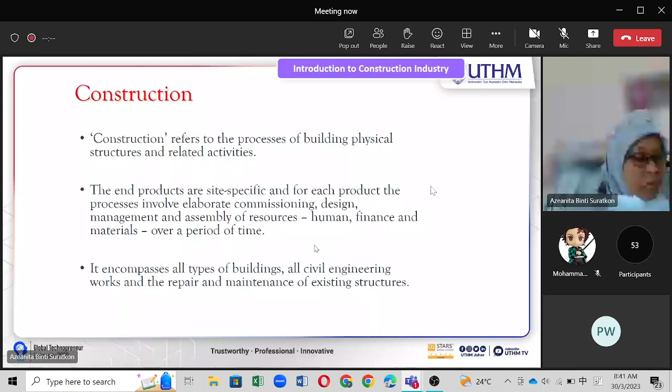Okay, so today I think we start here. Project management. Right, so we are going to try to distinguish what is project management, construction management, and contract management.

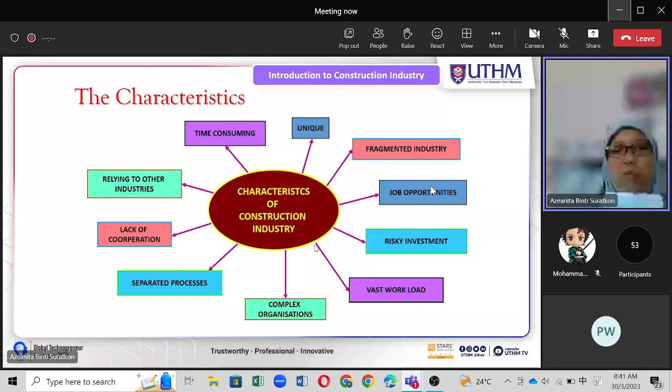Have you taken sustainable construction management subject? Have you, among you? Not yet? Yes, okay, so yes means you already taken that subject. Right, okay, so for those who already taken sustainable construction management, this definition is some sort of revision. Hopefully you have better understanding since this is second time or a revision.

Okay, so project management, so we have to look into what is project actually. Project is a temporary endeavor undertaken to create a unique product through a set of interrelated tasks. So it is a temporary effort, meaning we have certain duration to put our effort, and the objective of that effort is to produce a product, a building or infrastructure, and in order to materialize the product, we have certain activities, tasks to ensure that the product can be produced.

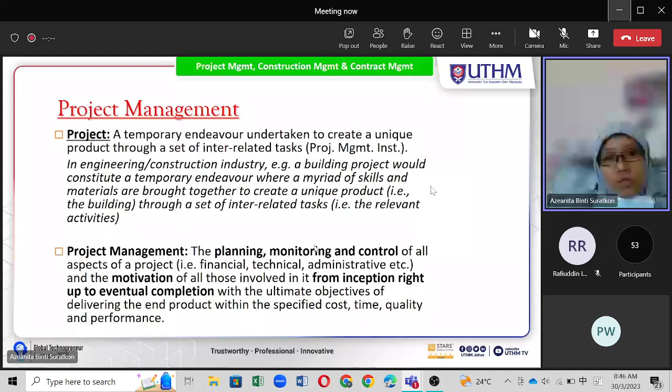It is actually, in general, a term used to describe a particular type of contract procurement method. This is like we mentioned last week, procurement method. We learn about design and build. So all these things are examples of contract procurement method, or project management method.

So construction management, CM, is also one of the contract procurement methods. So there is one general definition of construction management. And then the second one: the actual process of running a construction project is also called construction management. Similar to project management, because we have the word management here, it must comprise these three things: planning, monitoring, and control.

The same applies to all aspects of the construction process, but this is limited from pre-tender to the completion stage. Pre-tender normally means before we call tender, before we open tender for the project to any contractor. This may include preparation of the tender document, maybe finalizing the design, for the purpose of tender. So that is part of construction management.

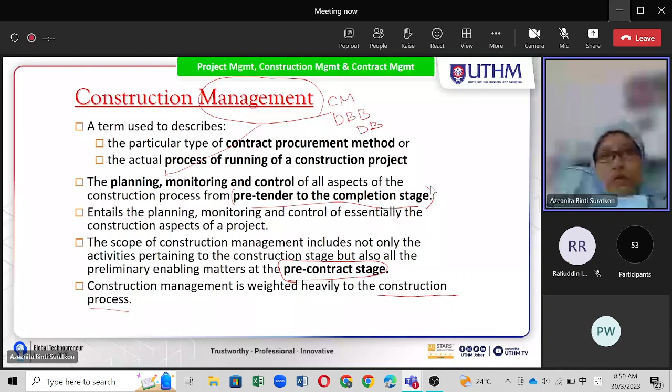Contract itself is actually a legally binding agreement between two or more persons which creates mutual rights and duties enforceable at law, or a legal device for conducting exchanges between parties, binding parties to future performance. So we are talking about agreement - contract is actually understood as an agreement. The agreement must be legally binding, meaning it is governed by law.

Between two or more persons, and then we have this mutual rights and duties. So if we talk about agreement, actually we can create mutual rights and duties. At the very beginning, both parties will have these rights and duties - they agree mutually, both sides. And the agreement can be enforceable by law, meaning it is legal.

So it is also called a legal device for something to be executed, to be performed in the future. So we also have contract - normally we are talking about something that we will do in the future. So that is contract.

Contract management is a term to describe the control and administration of the legally binding agreement between two or more parties from its inception up to its final discharge. So actually we are controlling, we are administering the legally binding agreement. There are procedures, there are few rules and regulations that we need to follow throughout the contract, from its inception up to its final discharge.

So like project management, we have the contract management part of it. The same goes with the construction management. So contract management is actually within both project management and construction management, because during project management the contract actually exists - for example, if we are talking about design, bid and build, this is traditional.

So during the project early stage, for example, during the planning, and then maybe we are talking about design stage - at this stage actually there is a contract between client and also the consultant who actually comes up with the design.

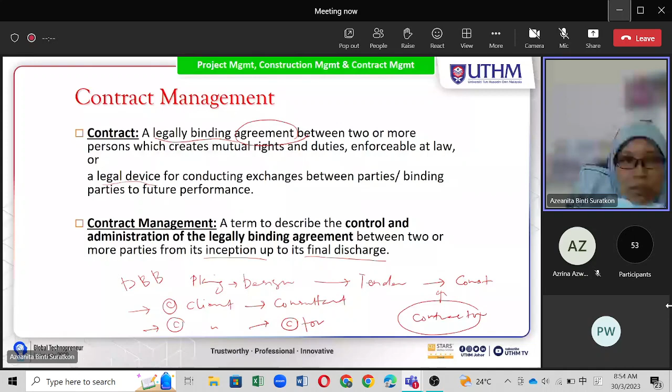So for example, for construction project, we will have articles of agreement, and then we have standard of contract where actually they have a clause, clauses actually spell out for the contract. For example, what is the SO responsibility, what is the contractor responsibility.

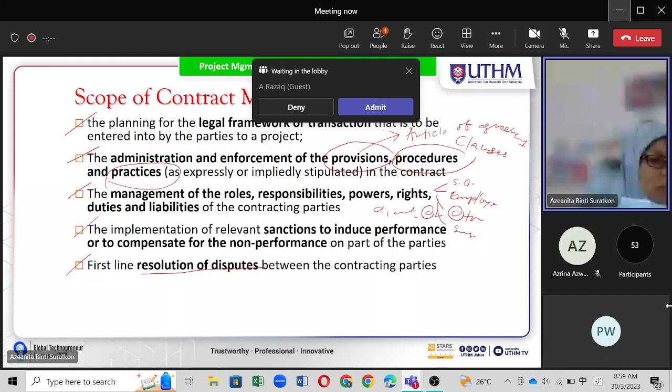If one party is not performing to what has been specified in the contract, what can the other party do - giving warning, for example. These are examples mentioned in the contract. So this is the scope of contract management.

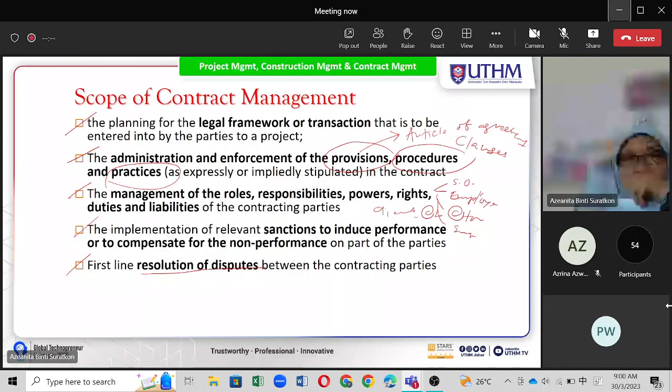Next, purpose of contract. The contract entered into by the parties is actually contract management. So what is the purpose of contract management? The parties perform their respective obligations and duties under the contract fully. Once they have the contract and the provisions, they understand what they need to do, what they cannot do, what they should avoid, to avoid the contract being terminated, so they know all those things.

So fully, efficient and fair contract management can be done. The purpose is that by having a proper contract, it would help the parties perform their respective obligations and duties fully. It is clear in the contract that each party receives the full benefit due under the contract - for example when the contractor will be paid, how much, and when the building or infrastructure needs to be delivered and handed over to the client. All these things are specified in the contract, and with that clearly stated, it will help contract management to monitor all those things.

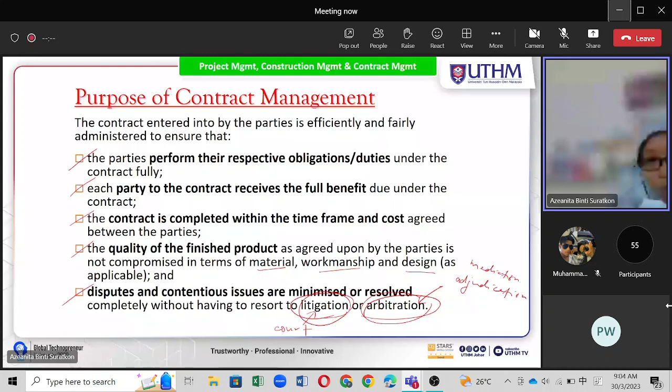Parties involved in construction project and construction and contract management. So this is maybe you can add more, but so far this is what we can map - the stakeholders who are actually involved in any construction project.

So we start here, owner. Owner or developer, so sometimes developer is the owner or the owner is actually the developer. So owner can be from both sectors, public sector or private sector. Private sector like a developer for housing - there are many housing projects. Or apartment, condominium, KLCC, that is actually considered private sector.

Public sector is actually government bodies, for example like UTHM. So this is the owner. We have JKR or Public Work Department, who normally represents as the SO, Superintending Officer, for any government project. That is an example. But for UTHM projects, normally we have an office called PPP, Pejabat Pembangunan dan Penyelenggaraan, Office of Development and Maintenance. So normally the pengarah, the director of this office, becomes the SO of any projects in UTHM. So that is owner or developer.

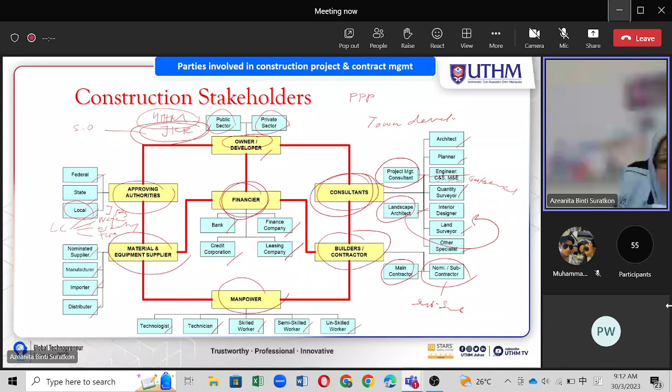And last one, but it is very important, which is approving authorities, whether at federal level, state level, or local authorities. So normally normal project is under this local authorities. Like what, like maybe water supply organization, electricity under TNB, maybe like fire department, something like JPS, something to do with drainage, whatever. These are examples of local authorities.

Right, so this is employer or owner. Just now, employer or owner, so we call also the client, purchaser or authority. Normally the person or party who wishes to have development project constructed on a piece of land. The employer is the most important party to a contract, as he is in reality the paymaster, who initiates and ultimately uses the tangible fruits of the contract. So paymaster here is actually pay the contractor for the work, pay for the land he wants to develop, pay for consultant, pay everything. So that's why we call it paymaster.

He initiates the project. He is the one who initiates the project. If you want to do the building, he needs to have the building, so he initiates the project. And then finally, he will use the tangible fruits of the contract, meaning the project, the end product, which is the building or the infrastructure.

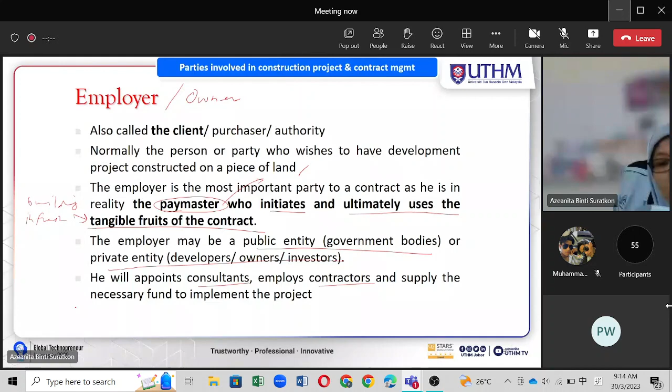The employer may be a public entity, government bodies, or private entities, developers, owners, investors. He will appoint consultants, employ contractors, and supply the necessary fund to implement the project. So that is the employer.

Now we go to the contractor. The contractor is the person or legal entity, partnership, or company who under the contract is actually entrusted to carry out construction work. Normally contractor, the root word is contract, right? So he is the one who executes the contract, so he becomes contractor. Normally focused on construction work.

So sometimes we call it builder as well, installer, erector, depending on the nature of the contract involved. For example, if the contract is just to install a solar system, we can call it just installer. So it varies, different ways of labeling this contractor. Erector maybe for some structure, maybe scaffolding - this is for a very big project which involves many scaffolding or special scaffolding or something to help the construction work, so maybe they will erect the scaffolding. So this is just an example.

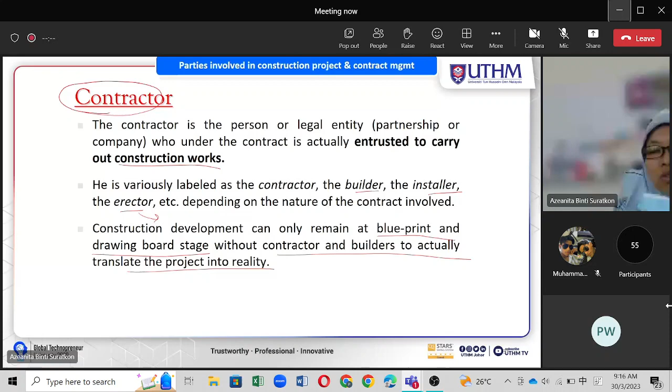Owing to the complexity of the nature of the contracts entered into between the employer and the contractor, they may be further described as a main or general contractor. This is very normal, normally for traditional contract DBB, we call it main contractor or general contractor. Turnkey contractor - this is normally for design and build, where the contractor will do the design and also the construction. So in this case, design and build or design and construct contractor.

So this is actually in the same group. Normally turnkey, the project is much simpler than this design and build. For example, maybe renovation of our house, so we can call it just a simple contractor. We just say what we want, and they will come up with the design and they will construct the work. So that is an example of a turnkey contractor.

And then management contractor, we call it MC, management contracting. The procurement method is management contracting, or we have construction management contractor - this is another project delivery method, construction management, where the contractor is called construction management contractor. Normally, these contractors enter into a main contract with the owner for the execution and completion of a contract. So these are their roles, and they have to contract with the client.

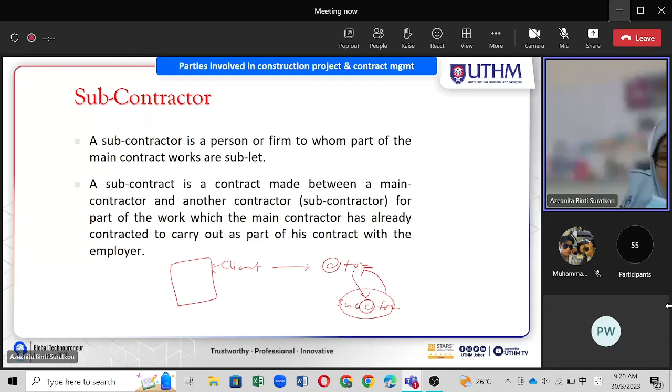Depending on the complexity of the works, the specialist skills required, the extent of detailing or design work involved, and the method of contract procurement adopted, subcontractors can be further classified as domestic subcontractors. This is normally a normal thing, domestic. For example, the main contractor is from Johor Bahru, JB, and he gets a project at BP, Batu Pahat. So this ABC company has a project there, so he needs to find a local contractor to help him work at Batu Pahat as subcontractor. So we call it local, domestic, or local.

Normally it is a requirement in a project for the contractor to find a subcontractor in the area just surrounding the project, to help flourish the economic activity for the local people.

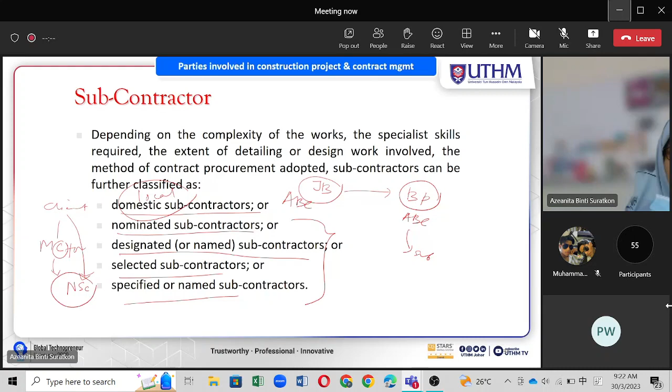Nominated subcontractor: a specialist contractor nominated by the owner, architect or engineer, who signs the respective subcontract with the main contractor and performs their respective duties and responsibility under the subcontract. So normally nominated by the owner, architect or engineer, who signs their respective subcontract with the main contractor and performs their duties under the subcontract. So this is one way - meaning the subcontractor is under the main contractor, but is nominated by the owner, architect or engineer, meaning the subcontractor has a good track record and the owner, architect, or engineer wants that subcontractor to work under the main contractor.

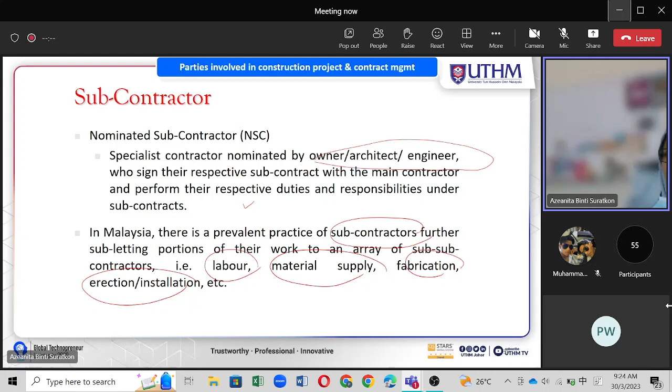In Malaysia, there is a prevalent practice of subcontractors further subletting portions of their work to an array of sub-subcontractors. So a subcontractor is allowed to sublet his work to another subcontractor, for example the labor, material supply, fabrication, installation, erection for the work that he has contracted with the main contractor.

Next, move to the supplier. A person or firm undertaking the supply of goods or materials to contract - the supplier's contract is usually with the main contractor. So in essence, a supplier is a contractor concerned solely with supplying goods and materials. Usually a supplier is actually a subcontractor but focused on supplying goods and materials, as compared to undertaking services or labor. So normally he just focuses on supplying goods or materials - that's why we call it supplier.

As for subcontractors, a supplier may be a domestic, nominated, designated, selected, or specified supplier - similar to subcontractor just now. This supplier can be named, appointed, or requested by the main contractor to be involved in the project under the subcontract work. In practice, the common types of suppliers encountered are the domestic, nominated or designated types. This is especially for special material which cannot be found with any other supplier - maybe this particular supplier is the only one who has that material, so we have to nominate or designate the supplier specifically to work under the subcontractor for his work execution.

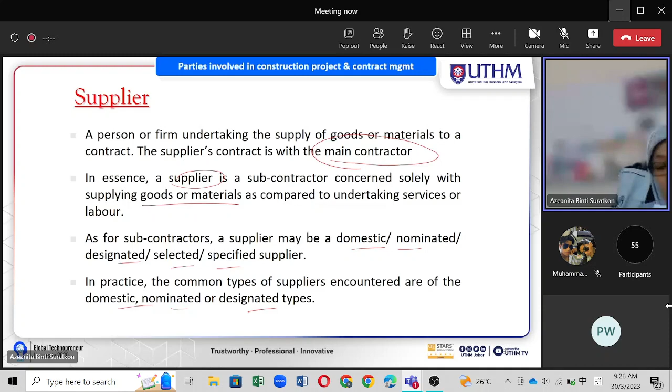Now we move to the professional - this is actually mostly the consultant. The professionals are not parties to the various contracts employed between the employer and the contractor, main contractor and subcontractors, and subcontractors and their sub-subcontractors or suppliers. So they are outside the agreement, not in the middle of this contract - they are professionally appointed.

The professional may have his own services agreement whereby he may contract to undertake either all or some of the following work, depending on his terms of employment: design work, supervision work, contract administration, or all three, or auditing or independent checking of turnkey or design-and-build contractors' work. For design and build contractors, normally there is no consultant appointed by the client, so all the design and construction will be done by the contractor itself. Maybe the client wants to appoint a professional to do the audit or independent checking of the design provided by the design-builder or contractor. And then project management or facilities management - so these are the range of stages where the professional can be involved in the project.

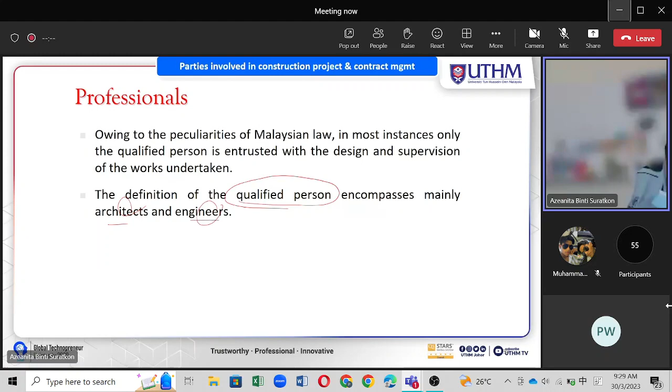So who is the architect? In most building projects, the traditional general contracting type, the professional team during design and construction stage is normally led by the architect. He leads the design and construction stage for a building project. He is the person who practices the profession of architecture and usually submits the application on behalf of the owner to obtain the development order, and designs and submits building plans for approval. So to obtain building plan approval and development order, normally it's the architect who submits the documentation to get approval.

Building bylaws define architects as any person who is registered as an architect under any law relating to the registration of architects. In the case of Malaysia, we have the Board of Lembaga Arkitek Malaysia, we call it LAM, or the Board of Malaysian Architects.

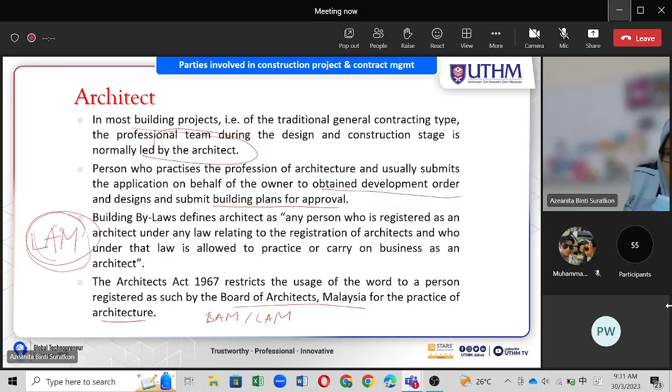Right, so engineers - you are engineers in the making. Inshallah, in a few years you will graduate and become engineers. A person who practices the profession of either civil, structural, mechanical, electrical, geotechnical, or other engineering usually designs and submits plans for approval by the approving authorities. The approving authorities are sometimes the local authorities, like the fire department, which is part of the approving or local authorities.

So again, engineers will be involved during the pre-tender stage. In projects that are of essentially engineering or infrastructure origin, the engineers are expressly stipulated in the contract as the principal designers, or contract administrator. So for engineering or infrastructure projects, you are the principal designers and contract administrators, and you are the qualified person.

In this country, the law restricts the label engineer to any person who is registered as a professional engineer under any law relating to the registration of engineers, and who under the law is allowed to practice or carry on the business of a professional engineer. So under the Board of Engineers Malaysia, BEM.

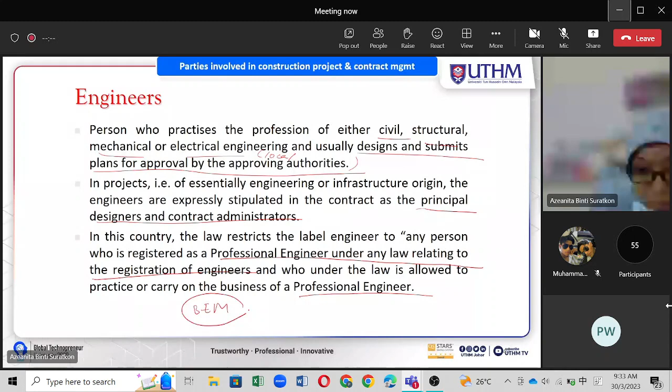Right, next we move to the QS. Quantity surveyors are persons who practice the profession of quantity surveying and building economics, and usually prepare bills of quantities, handle tender and contract processes, and evaluate interim payments and final accounts of the project. This is the scope of the contract. So preparation of bills of quantities happens after the design is completed by the architect and the engineers. They will come out with the BQ. The BQ will be used to call for tender, as a basis to measure the progress of work, and as the basis to pay the contractor according to their progress of work.

So in terms of final accounts of the project, this is under the responsibility of the QS. The QS may be engaged by the architect or engineer, or may be directly appointed by the employer, to play a role during the pre-contract and post-contract award stages. There is a necessity for the QS to be registered with the Board of Quantity Surveyors, under the Quantity Surveyors Act 1997.

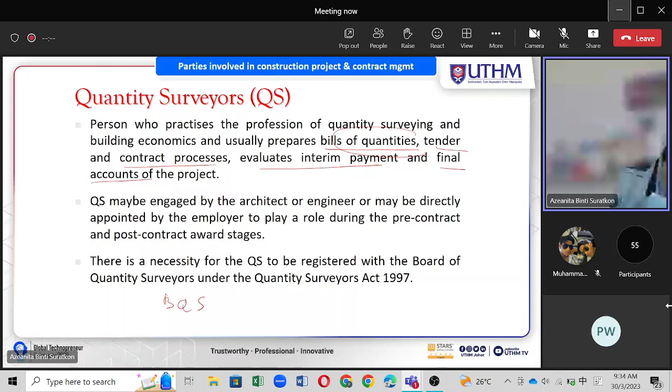So BQS - we have different professions registered under different professional boards. Right, we have other professionals. Land surveyor - a person who carries out boundary and contour surveys and other surveys on land, submits survey plans for amalgamation and subdivision of land, and applies on behalf of the owner for qualified titles and final titles from the land office. So that is the land surveyor - they help clients get the titles for the land to be developed for this project.

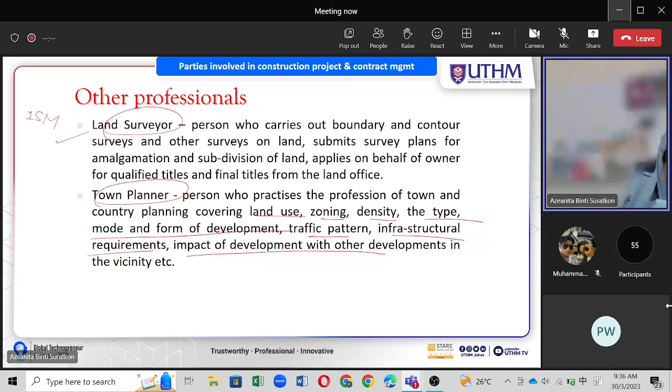Next, town planner - a person who practices the profession of town and country planning, covering land use, zoning, density, the type, mode, and form of development, traffic pattern, infrastructure requirement, impact of development with other developments in the vicinity, etc. So this is the town planner. For land surveyor, we also have the Institution of Surveyors Malaysia in Malaysia - land surveyor, building surveyor, and quantity surveyor are actually under the Institution of Surveyors Malaysia. This is an organization that covers all surveyors in Malaysia.

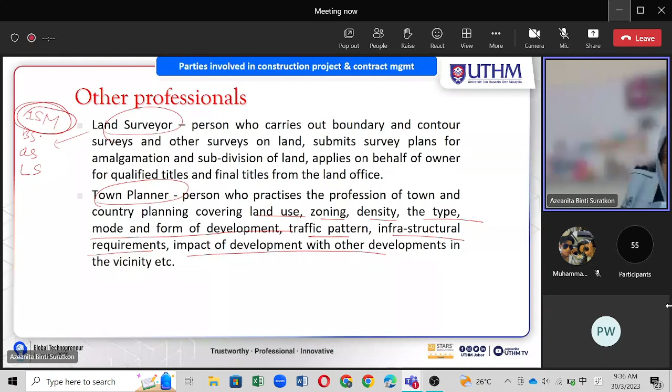We also have interior designer, or other professional consultant. This is a person who actually practices the profession of interior design, ID, performing furnishing and finishing work, usually for prestigious buildings, mega projects. So they will have an ID because they have to have a certain theme or concept for their building.

Landscape architect: persons who practice the profession of landscaping architecture involving beautification of the projects internally or externally by using plants of all kinds, rock, etc. So actually they have softscape and also hardscape.

Softscape normally involves plants. Hardscape normally involves rock, maybe something unnatural, like for example a pond - that is part of hardscape. Maybe you have benches, like cement ferro benches, whatever - that is hardscape. Softscape normally involves plants, so that is softscape.

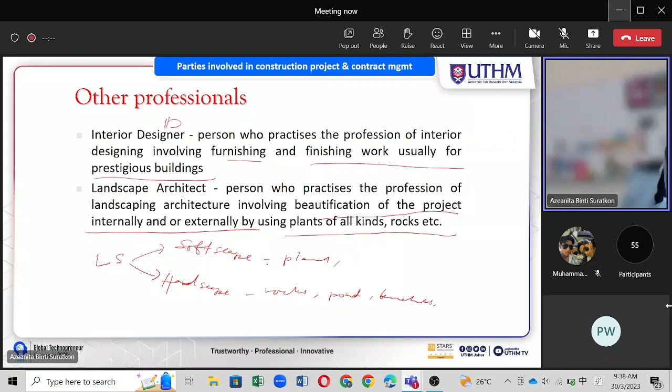We have other specialists - project management consultant. They can become other specialists as well. A person or group of persons practicing the profession of project management function. The works involved ranges from feasibility report, financial projection, design of management system, evaluation of design prepared by consultants, coordinating work of consultants, etc. This is project management consultant, which is actually specific - their work depends on the scope.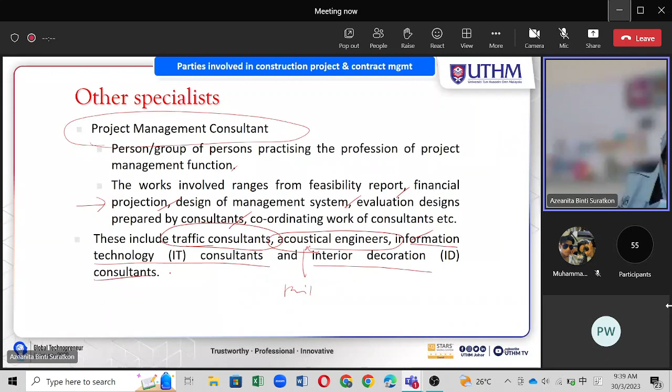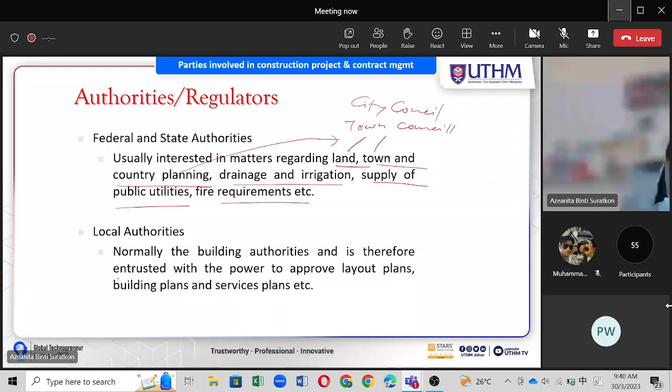Authorities or regulators - federal and state authorities usually interested in matters regarding land, town and country planning, drainage and irrigation, supply of public utilities, fire requirements. So this is, for example, land, town, country planning, maybe town council, city council - these are the authorities or regulators. Drainage and irrigation.

Like in Malaysia, we have Jabatan Pengairan dan Saliran - in English, Drainage and Irrigation Department, DID.

We also have local authorities - normally the building authorities, entrusted with the power to approve layout plans, building plans, service plans, etc. So these are almost similar, only this is at local authorities level. Fire requirement normally is the fire department - bomba.

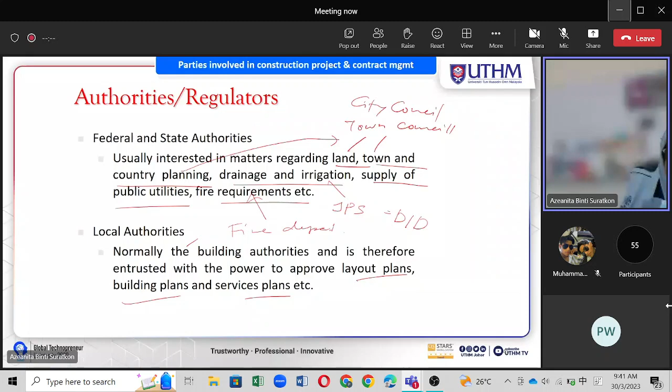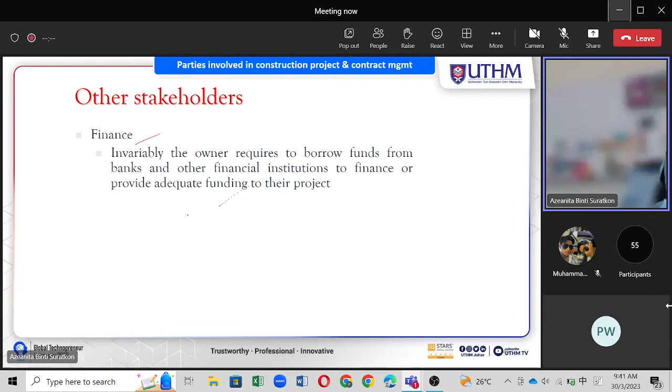Other stakeholders - finance. The owners are required to borrow funds from banks and other financial institutions to finance or provide adequate funding to the projects. So sometimes the owner has to take a loan from these finance organizations to fund the project.

We also have manpower - craftsmen, or actually skilled workers, this is the terminology for skilled worker. In the industry, especially in new construction methods, it is necessary for them to appreciate not only the how, but also the why of the work they do. So these skilled workers not only know how, but understand why they have to do that.

Semi-skilled worker: those who possess skill in one or more construction trades, but have not attained the requisite level of skillfulness to be paid as skilled workers. Then we have unskilled worker: those who do not possess skill in any building trades but are working on construction site, performing basic functions such as carrying materials, etc. So unskilled workers do simple but heavy work - for example, carrying materials, mixing concrete, clearing the site.

We also have technician: persons qualified by specialized technical education and training to work under the general direction of technologists. And a technologist is a person who has the qualification and experience required for corporate membership of a professional institution.

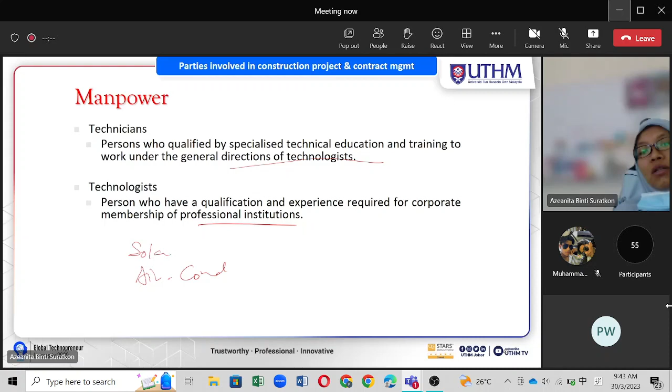Alright class, can we move on a little bit? Maybe this is the last part for today's class. So we have learned many stakeholders - construction stakeholders, the different parties who are actually involved in construction projects. Let's have a look at this, and hopefully after this I can call a few names just to give you an idea about this.

Right, okay. So what was included in the client's requirement? This is maybe the intention of the client. In the client's requirement, okay, who prepared it? Maybe this is the architect, who leads the project. So the client's requirement is something like this, okay.

Right, okay, and then what was included in the budget? We only have the rope, okay, for this swing, right.

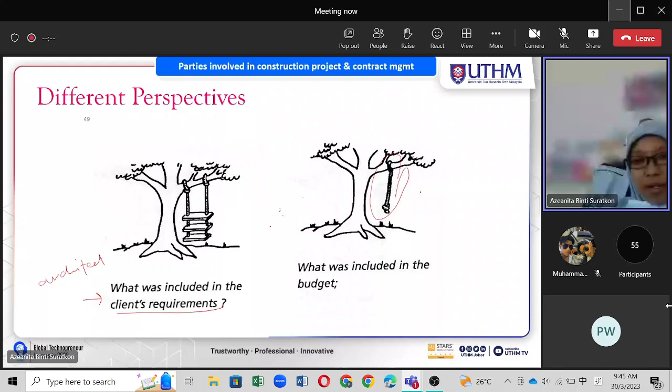Okay, so the architect normally wants to do things which are unique, rare, okay. So he wants to do something like this: the swing, not swinging from the tree, but swinging from the ground. The architects normally want to do very artistic designs, maybe. Okay, so this is his idea.

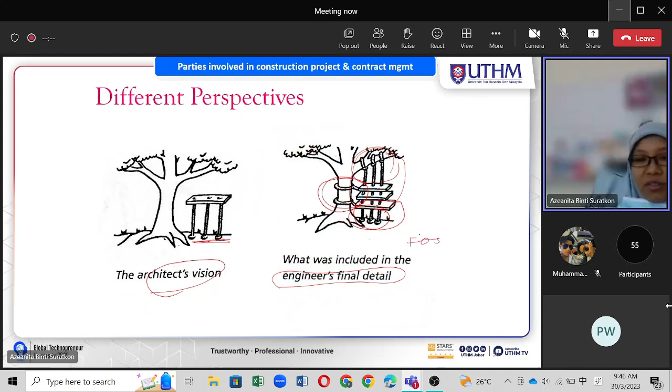Right, so for the engineer's final details, okay, he includes everything that is in the client's requirements, and this is what's included in the architect's vision. Factor of safety here, so they include this. So I'm not sure whether it is a swing or a ladder now, too much factor of safety, overly designed, right?

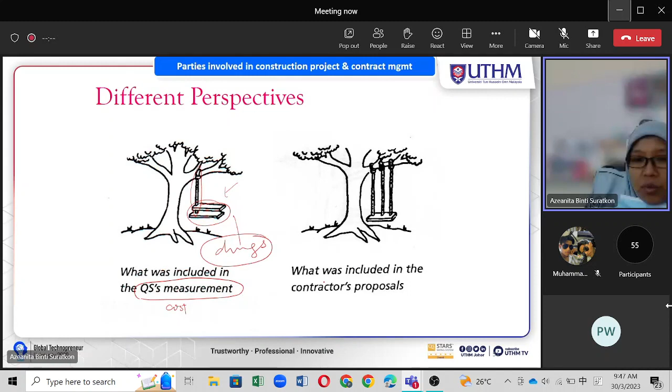This is talking about the cost, right? And then what is included in the contractor's proposal? So this is what the contractor is imagining to construct, okay, based on the document that he has.

Right, so anybody want to give your idea or opinion about all these things? Why do we have this different perspective? Okay, anybody want to try? In my class, whoever asks good questions, not necessarily good questions, if you ask or answer questions I will give marks for in-class participation. So I call any volunteer. Any volunteer want to give your opinion? Class, please, anybody?

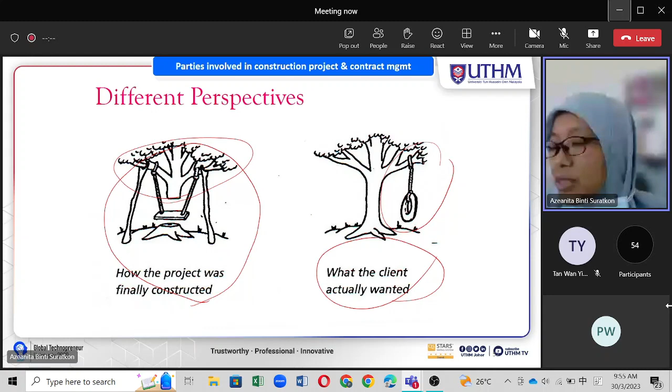So I think I can only take this opinion, we are short of time already, actually we exceeded last time. So thank you very much, very good, for all the opinions. Actually, one of the questions can come out in your test or final exam.

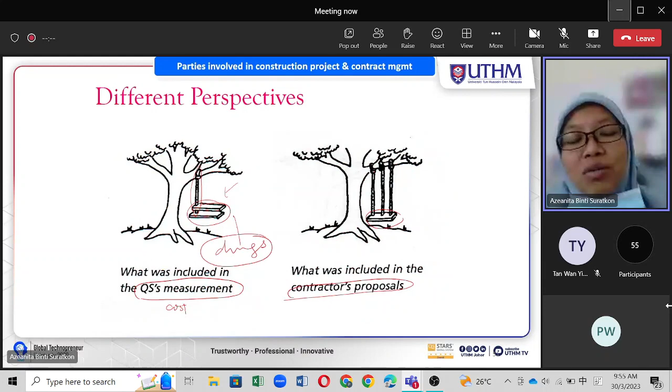They are asking about this, so you can think over it and find more information. Why do we have this different perspective? Different personnel, different professionals, they have their own way of thinking, their own way of seeing things. So if they work alone and don't communicate properly, that's why this can happen, or even worse things can happen.

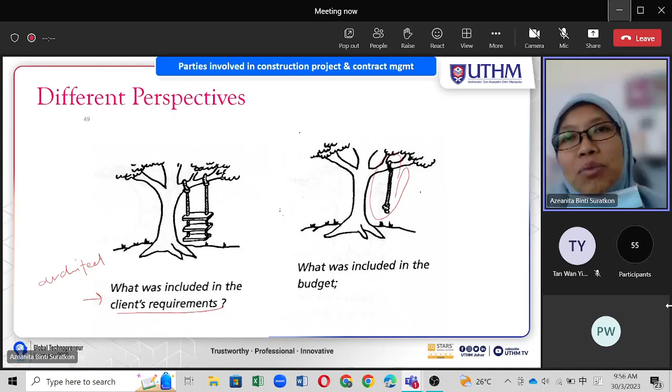That's why communication is very important, they need to work together as early as possible. For example, the architect needs to ask input from the engineer, from the contractor, in terms of what I mentioned last week, the constructability or buildability. Remember this terminology? Buildability or constructability, so this is what we are talking about.

So the client specifies what he wants, and he has some budget, so there are limitations. Normally if the client has a limited budget, the architect must design carefully, as simple as he can, just to meet the client's needs. But if the client has no financial restriction, no limitation in terms of money, for example, like Arab countries, they have very futuristic buildings, because they have a lot of money, they don't know what to do with it, so there's no limitation. That's why architects and engineers can design very futuristic, artistic buildings.

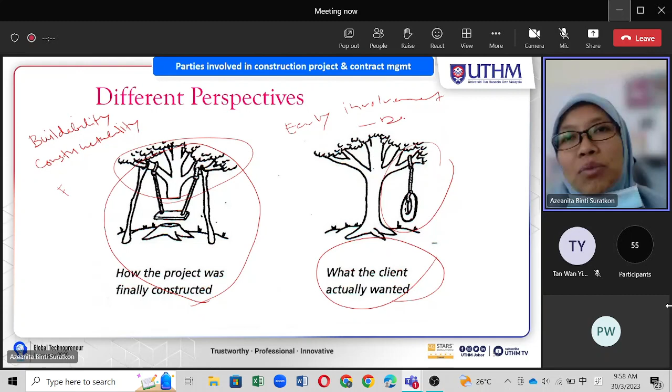So the most important thing is how all these professionals can actually get involved, give early involvement, not only during the design stage, not only the architect. We have the architect here, the engineer here, so the contractor, if possible, can be involved earlier during the design stage, so we can have better buildability or constructability.

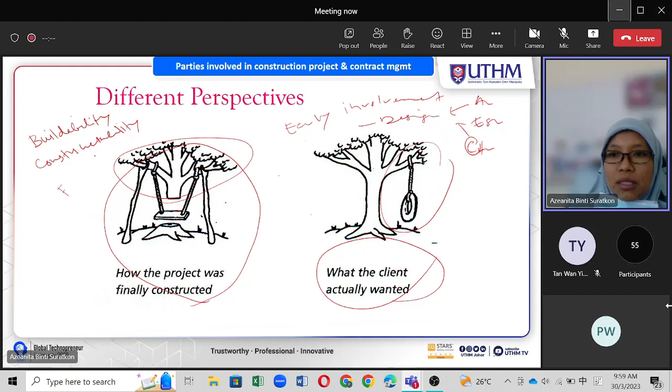That's why right now we have BIM, building information modeling, like I mentioned just now. This gives a chance for the architect, engineer, QS, especially during design, to work together. Because they work on the design together, everybody knows what the design is, and they can give real time comments - that's why this is very important.

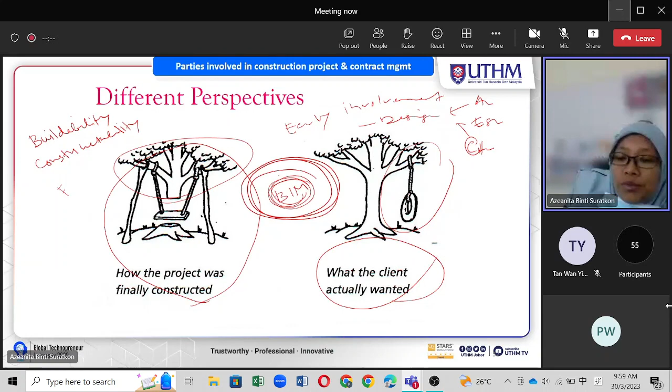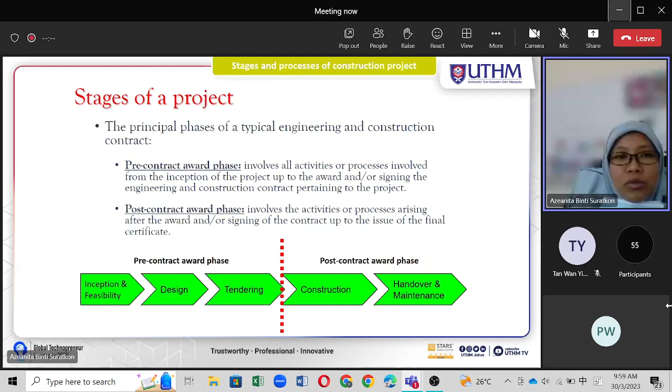Right, okay, so I think that's all. So next week you can go through this slide first on the stages. This is the last part, also very important, always comes up during the final exam.

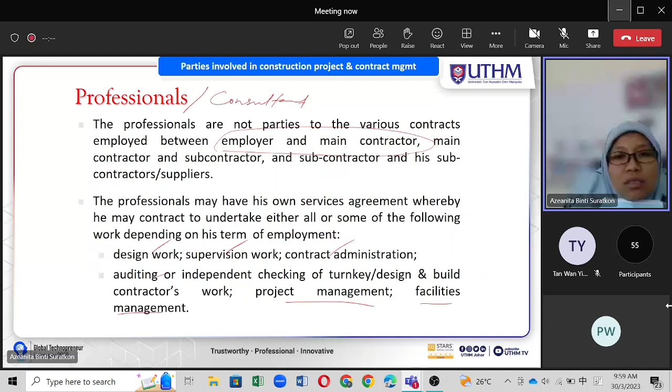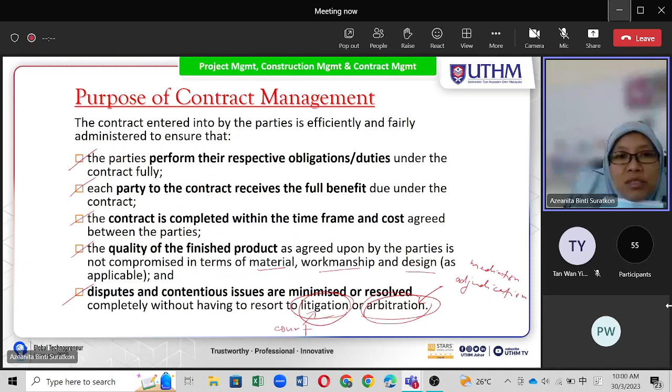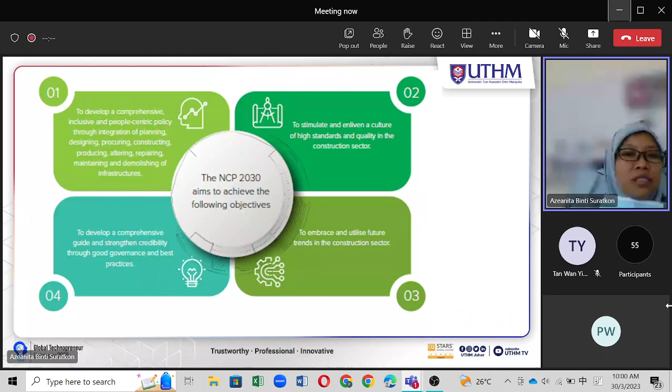Right, so I think that's all for chapter 1. We will continue the last part of chapter 1, which will focus on these stages and process of construction work. This will be on our next week's class on Monday, Inshallah, okay, that's all from me.